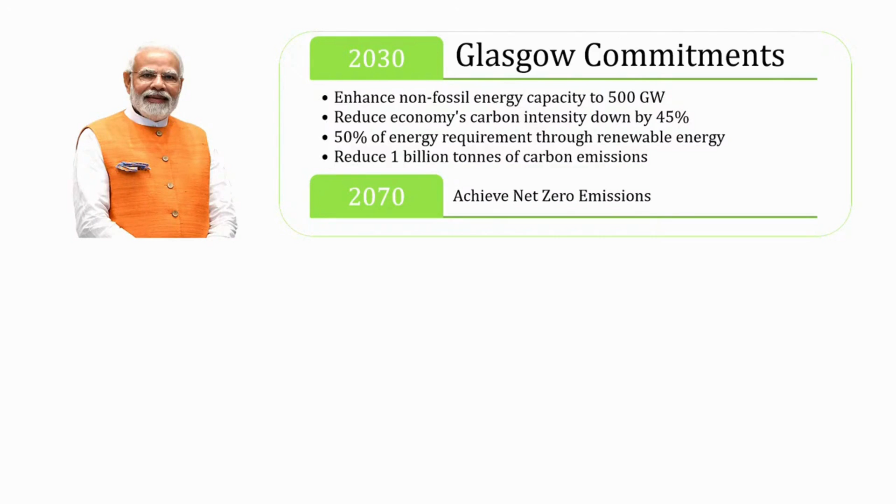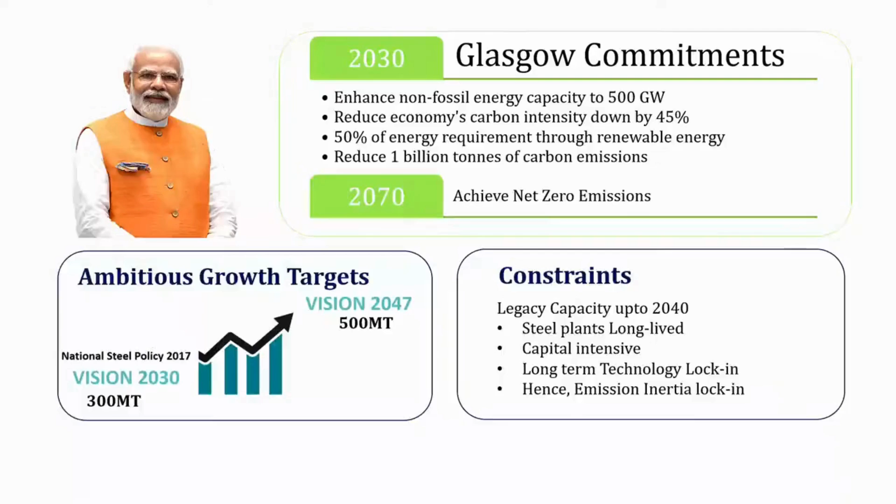Aligning with Honorable PM's 2030 Glasgow commitments and 2070 net zero goals, while trying to balance our ambitious growth targets of 2030 and 2047, also while circumventing the constraints of our legacy capacity up to 2040, as steel plants are long lived, capital intensive with long term technology lock in and hence having high emission inertia lock in, Ministry of Steel has already embarked on the journey of decarbonization.

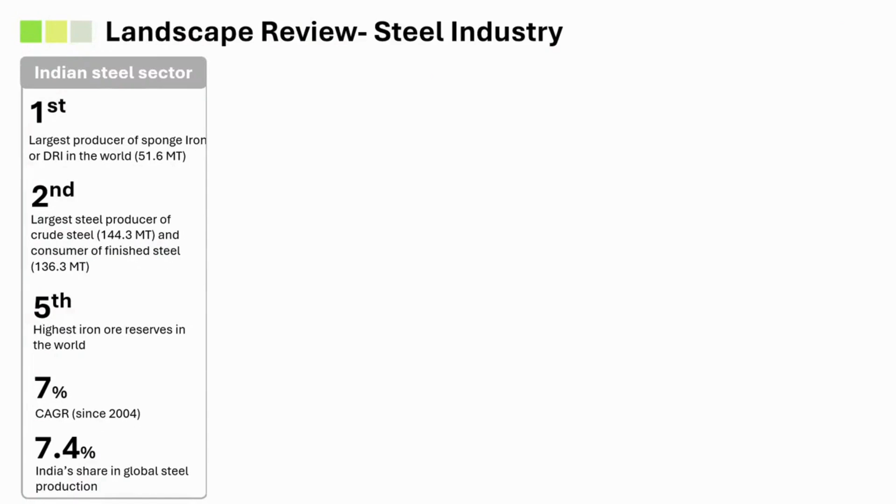Just to give a landscape scenario of the steel industry of India vis-a-vis the world, as you all know, the Indian steel sector is the first largest producer of DRI, second largest producer of crude steel and consumer of finished steel, has fifth highest iron reserves, and has been showing 7% CAGR since 2004 while having 7.4% share in global steel production.

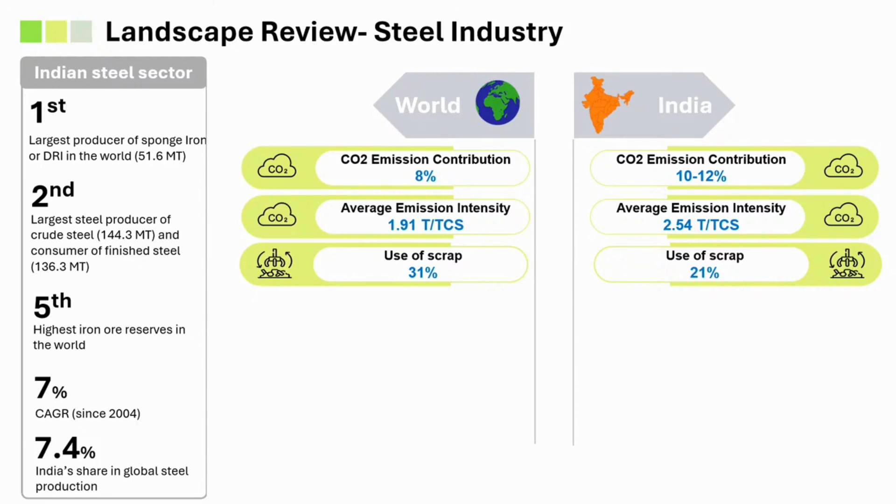But this is also the fact that when we compare the emissions, world steel industry contributes about 8% of emissions while Indian is at 10 to 12%. Average emission intensity of world is 1.91 tons of CO2 per ton of crude steel while Indian is 2.54. And the reasons are many. One of them is the scrap usage. It's 31% on an average in the globe, while in India it's only 21%.

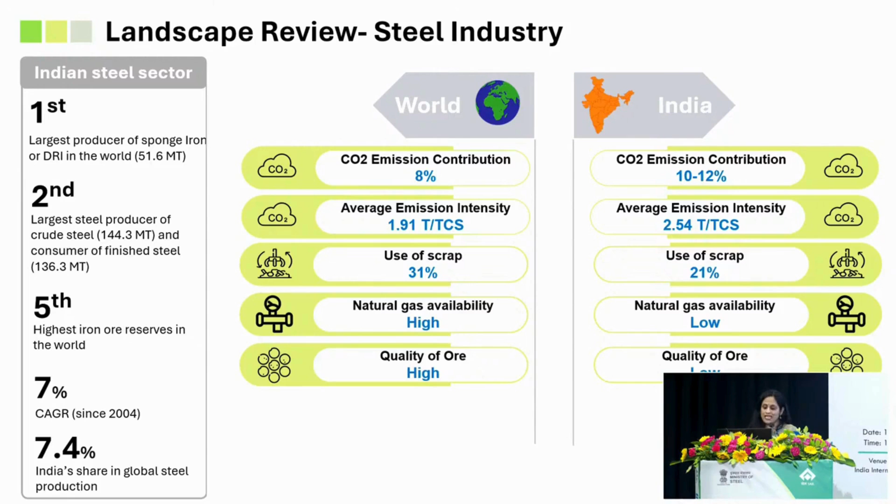Natural gas is easily available at a cheaper cost. However, it's a much different scenario in India. Quality of iron ore at many places across the world where the emission intensity is low is high, while India is dealing with a low quality iron ore. And emission intensity of the grid is lower in Western countries, while in India it's quite high. So these are the factors which actually contribute towards a higher emission intensity.

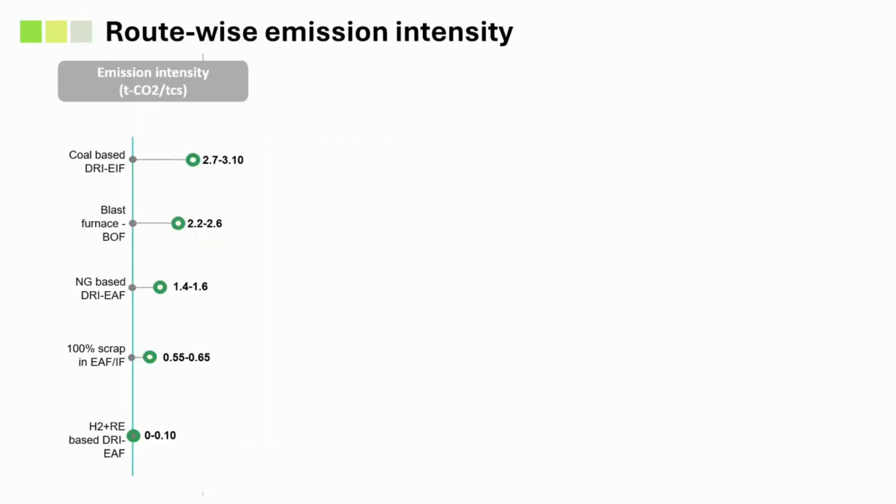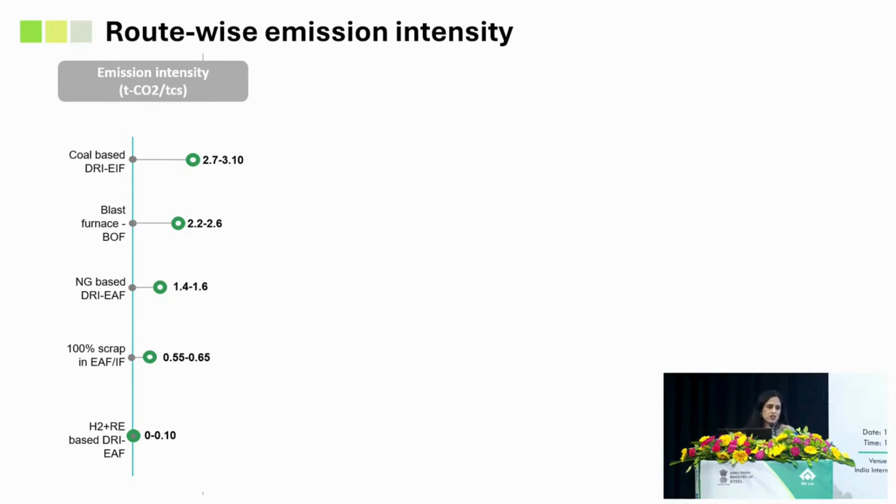And if we just look at this graphic, it shows how our intensities are distributed across different production routes. We have highest emission intensity for coal-based DRI, electric arc furnace or induction furnace route. Then we have blast furnace. Natural gas-based route shows almost half the emission intensity. 100% scrap route has almost negligible emission intensity, while hydrogen-based DRI electric arc furnace production takes us to near zero emissions.

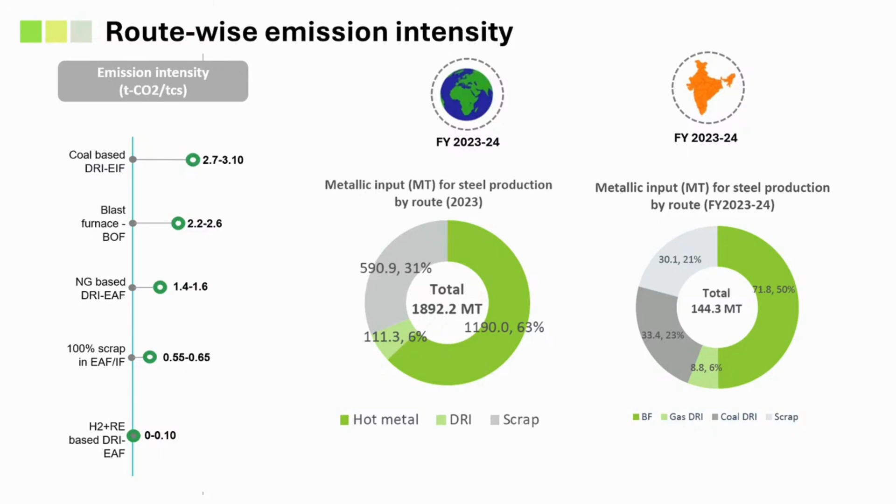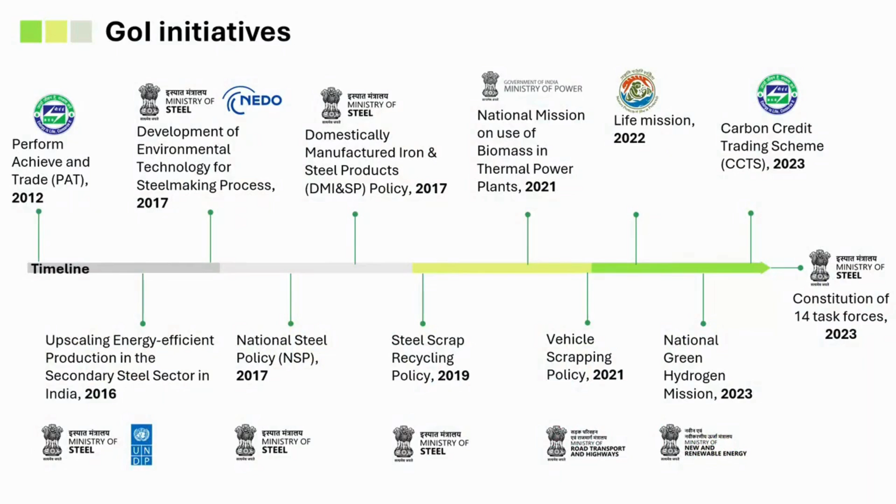So this is why our emission intensity is high, and this is what drives our strategy towards decarbonization. Talking about Government of India initiatives, a lot of work has been done since 2012 when the PAT scheme came. We have worked with NEDO, Japan, and UNDP for improving energy efficiency in steel sector. Various policies like National Steel Policy, domestically manufactured iron and steel products policy, steel scrap policy, vehicle scrapping policy, etc., have been working towards this end.

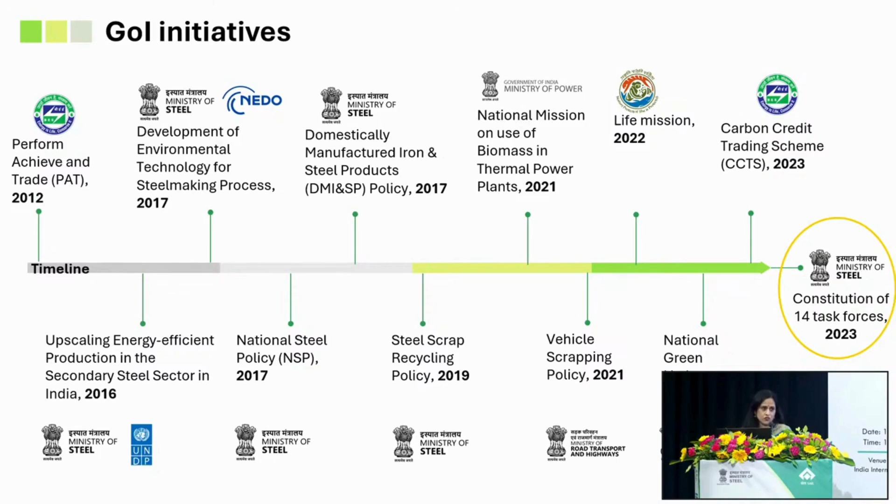And the recently launched National Green Hydrogen Mission as well as CCTS scheme show us a really definite pathway towards decarbonization. Ministry of Steel also took a very concrete step by constituting 14 task forces last year. These task forces covered the whole gamut of decarbonization levers, which can be broadly divided into demand side drivers, supply side push, as well as key enablers.

Looking at demand side drivers, one very important factor for driving green steel production is developing taxonomy of green steel. Nowhere in the world is green steel defined, and neither in India. Unless we know what green steel is, how are we going to produce it? How are we going to finance it? How are we going to market it? So this is a pertinent question, a puzzle which the ministry is committed to solve.

Monitoring CO2 emissions is very important because unless we have a set MRV mechanism, how do we benchmark our current emissions and how do we know how we are progressing? Demand generation is equally important policy lever because unless we create a market for green steel at a higher premium, producers may not find the right nudge to produce green steel. So these are the policy accelerators which the ministry is already working on.

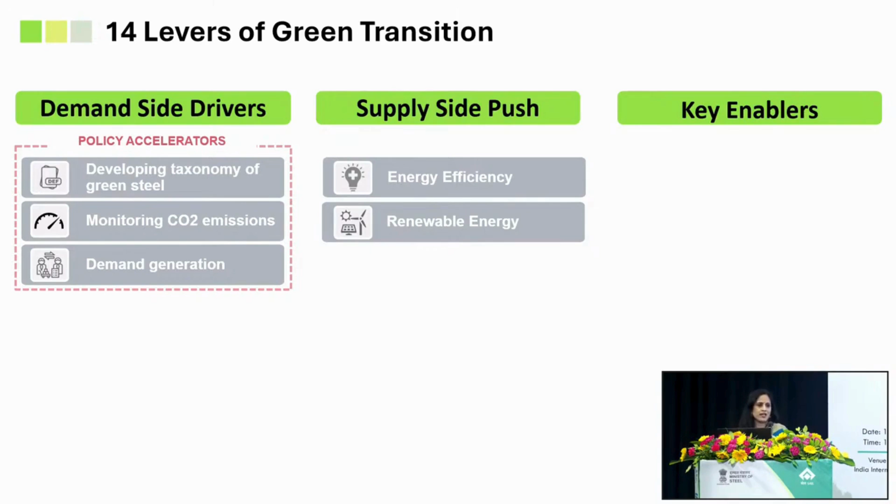For the supply side push, energy efficiency and renewable energy have been considered low hanging fruit because the technology is already there. We just have to increase the penetration through infusion of finances, developing the right ecosystem and having some policy interventions. So these are the sprints which can take us towards 2030 carbon reduction goals.

Process transition from coal-based DRI to gas-based DRI is extremely important. As you have seen, 23% of our production depends on coal DRI. We want to make our industry gas ready, be it natural gas, syngas, or hydrogen. The idea is to move from rotary kilns to vertical shaft.

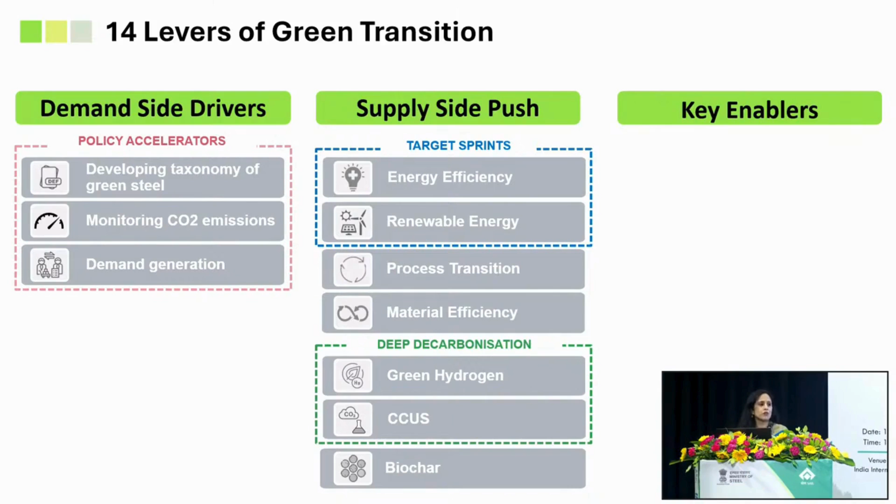Material efficiency encompasses beneficiation, pelletization, and increased usage of scrap. Green hydrogen, as you all know, is a very important lever as it has the potential to reduce carbon emissions to near zero. CCUS is again very important for the steel industry because it has been found through our work that at least 50% of emissions cannot be abated in the steel sector without the use of CCUS given our current production routes. Biochar is also emerging as a new field where it can replace fossil fuel-based coal. Key enablers include R&D, finance, international focus, and skill development.

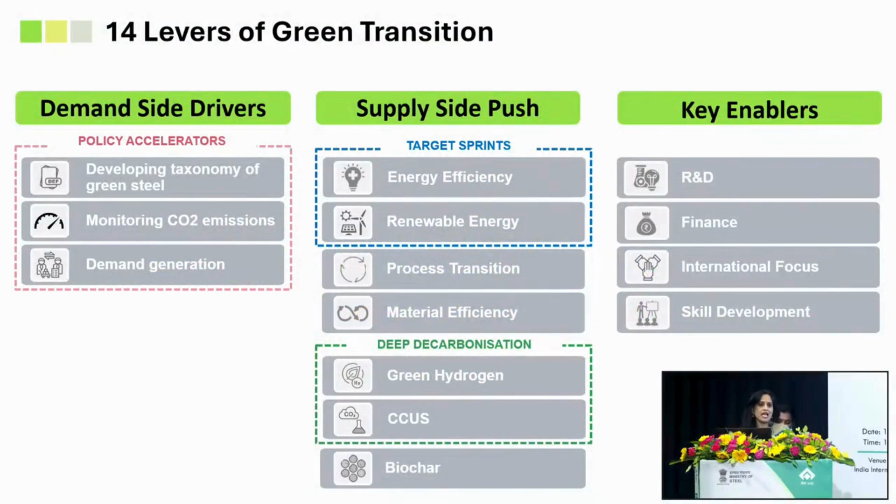So, ladies and gentlemen, these are the 14 levers on which the ministry has been working with the help of the task forces. We have done comprehensive analysis of all these factors. We have tried to figure out what is the current scenario, what are the global best practices, what are the challenges we face, and what is the way forward to deal with all of these. And this is what is presented in the report, which we are going to release very soon.

While going through this analysis and rigorous deliberations, we figured out the constraints for green steel transition can be divided into 4 buckets: resources, policy, technology, and finance. In resources, we've already seen that low-grade iron ore and coal, low availability of natural gas, low availability of scrap, high grid intensity, and low land availability for RE plants are the constraints.

In policy, green steel is not defined. There is no baseline established for emissions yet. No incentive for steel producers to produce low carbon emission steel. And then there are variable policies across different states for RE.

Technology: we have seen the steel industry is a long-term technology lock-in sector. Use of 100% green hydrogen is not established commercially yet anywhere in the world. CCUS, that is carbon capture, utilization, and storage technology, is also not fully matured. CCS potential, that is carbon capture and storage potential, is not established yet in India. Lack of adequate investment in R&D and lack of access to round-the-clock RE, as well as alternate routes of low emission steel making like molten oxide electrolysis, etc., are at low TRL.

Finance: we are a very capital intensive industry. Cost of green hydrogen is very prohibitive. We have a huge appetite for using hydrogen blending in blast furnaces as well as gas-based DRI, but it's the economics which doesn't work out. Again, CCUS cost is very, very high.

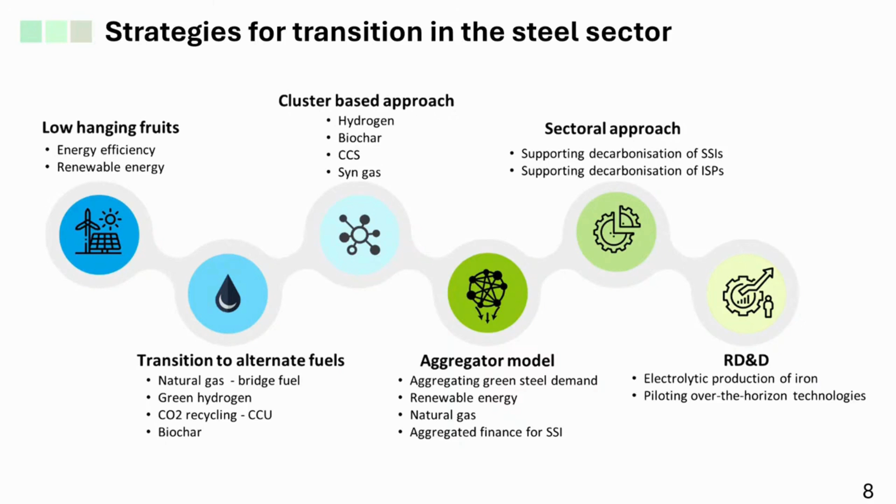Ministry of Steel has identified various strategies for transition of the steel sector, and they can be grouped. One is low hanging fruit. What we are targeting is 2030. If we just focus on energy efficiency and renewable energy, we would easily be able to meet at least 12% reduction in the steel sector. Transition to alternate fuels needs a concentrated focus: natural gas, green hydrogen, biochar, and we also considered recycled carbon dioxide converted into CO as another potential fuel.

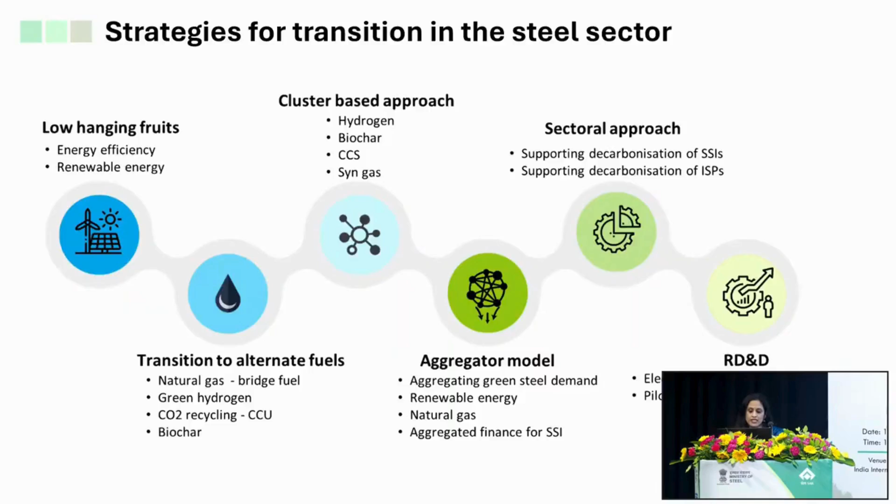Cluster-based approach is more important for SSI industries, secondary steel industries, and hydrogen, biochar, CCS, and syngas are where this approach would greatly benefit. We're also looking at aggregator models for aggregating steel demand, renewable energy demand, natural gas demand, and aggregated finance for SSI. We definitely need different sectoral approaches for SSIs and ISP, and there's a lot more work to be done in R&D.

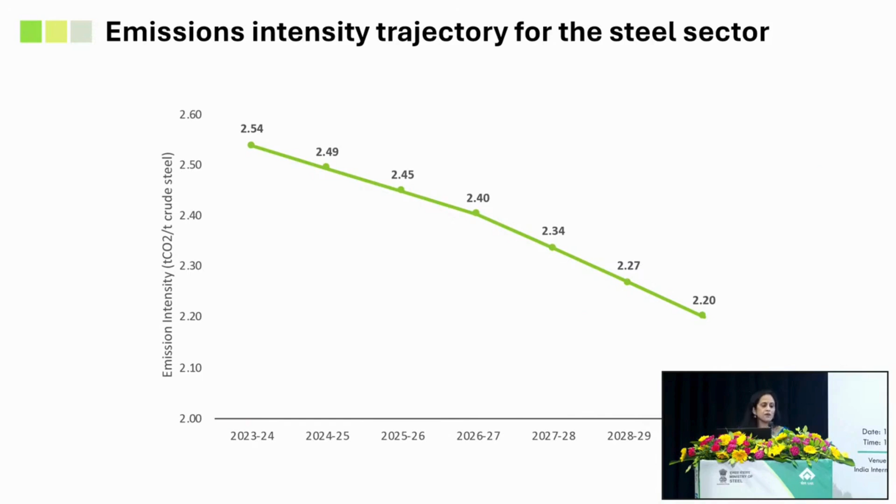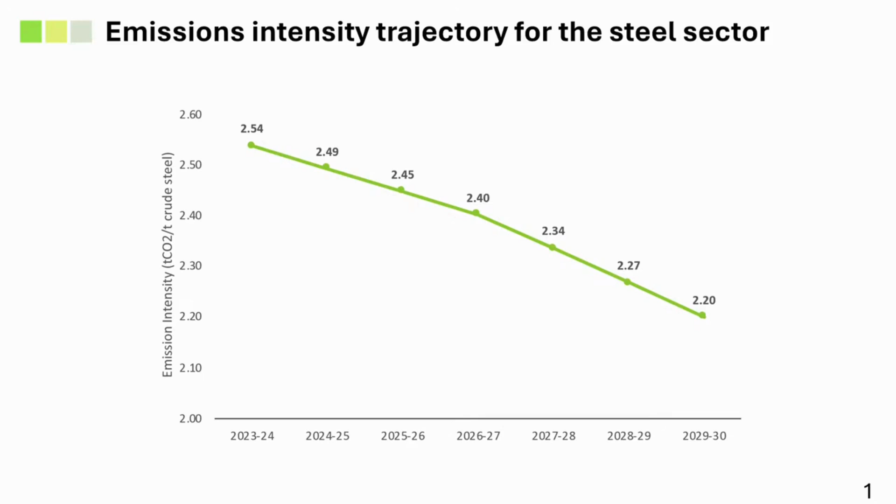So this is the emission intensity trajectory for the steel sector as worked out together with BEE, Bureau of Energy Efficiency, under the CCTS scheme. We are right now at 2.54, and by 2030, we would be about 13.4% down to 2.20. So this is how the emission trajectory will look for the steel sector. This target is very easy to meet, and I am sure we will overshoot it. The major targets for decarbonization of the steel sector have already been defined in this roadmap in this report, and I'll just skip this.

So, ladies and gentlemen, what we present in this report is just the beginning of our journey. We still have a long and winding road in front of us. I'm sure with the help of all the stakeholders present in this room, we should be able to meet our targets and fulfill our climate commitments.